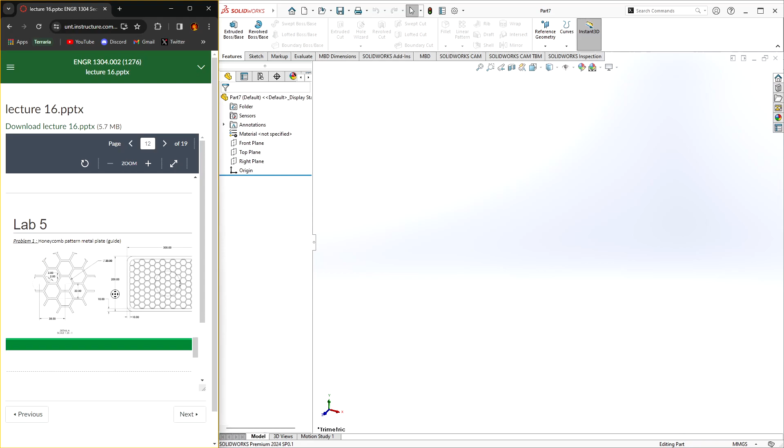Alright guys, so lab 5. We have to make this honeycomb pattern. So what we're going to do is just make the honeycomb pattern first and then make the frame around it second.

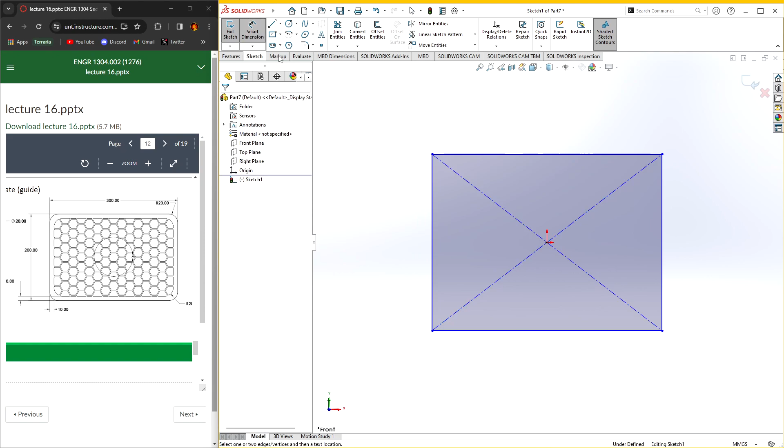On my front plane I'm going to do a sketch. I'm going to make a base plate, not with the corner of the rectangle, but with the center rectangle. So I'm just going to do this, set the length equal to 300, set the height equal to 200.

I want to fillet the corners to be 20 millimeters. Bang, bang, and this one too. Okay, so with that done, I'm going to make a polygon.

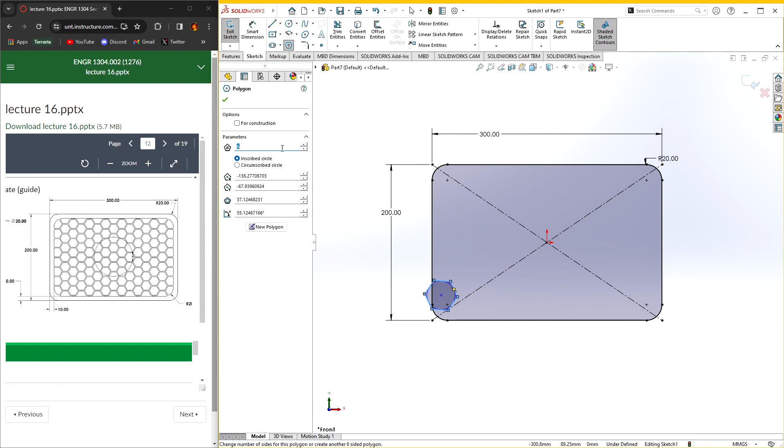I'm going to just make it out here. I don't want it to be correlated to any of this, I just want it to exist. So I'm just going to make it right here. This one is going to be our parent polygon. I'm going to make it have a diameter of 20 millimeters, and set the top part to be horizontal.

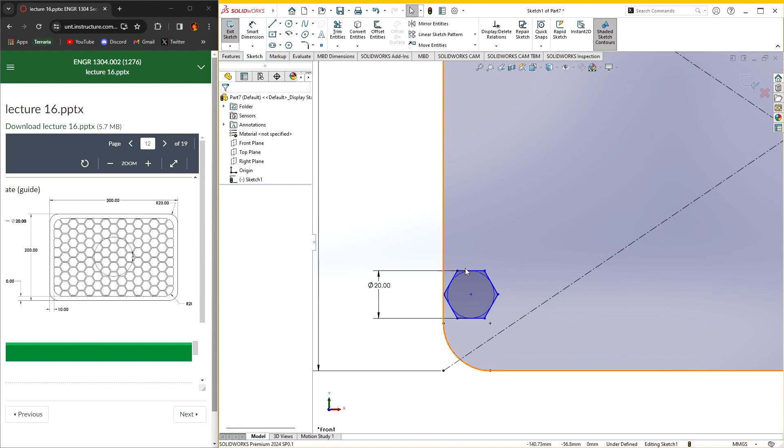From here we're going to do a linear sketch pattern. I'm going to highlight all the edges as well as the arc in the center. There we go, linear sketch pattern.

So what I wanted to be able to do is go all the way to the opposite side and also all the way up. If I count from the drawing that he gave us, I want one to end up right here in the center. So from here there are 1, 2, 3, 4, 5, 6, 7. So from here I need 7, spaced apart.

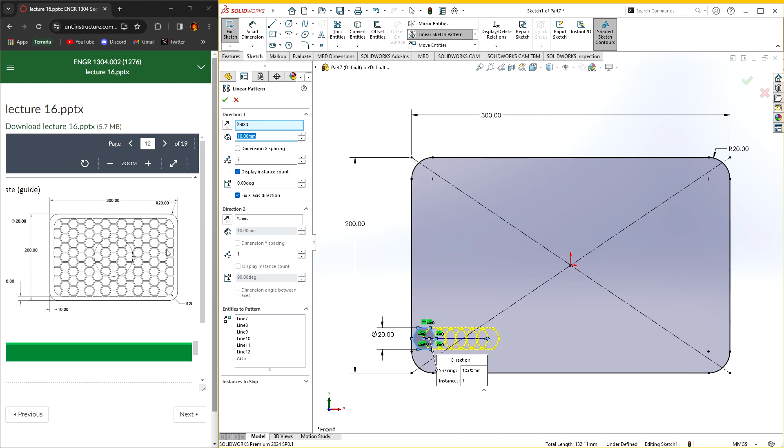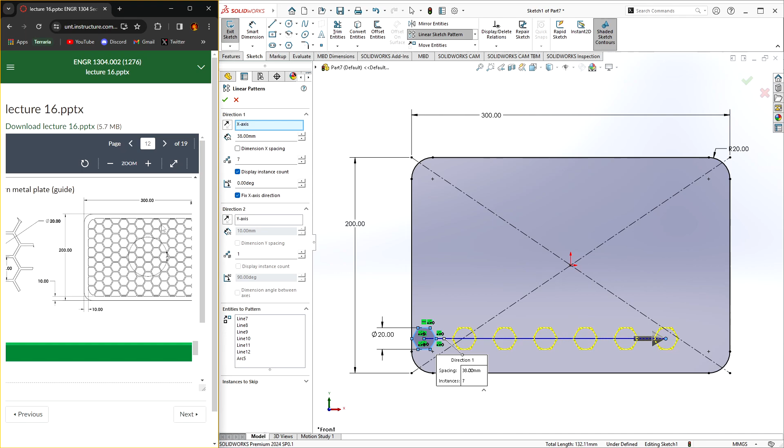38 millimeters apart. And then I want them to be 22 millimeters high on our y-axis. Well first let's see how many I need in my y-axis. So I need 1, 2, 3, 4, 5, 6, 7, 8, 9. So I need 9, spaced apart 22 millimeters. There we go.

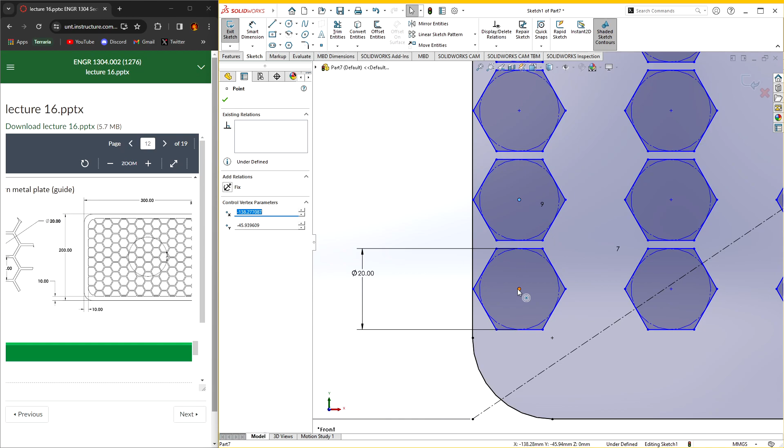And we're gonna click OK. So with this I'm gonna put one in the center in a minute, but first I need to organize these because these are all just free floating. So what I'm gonna do is click that midpoint, make those vertical to each other.

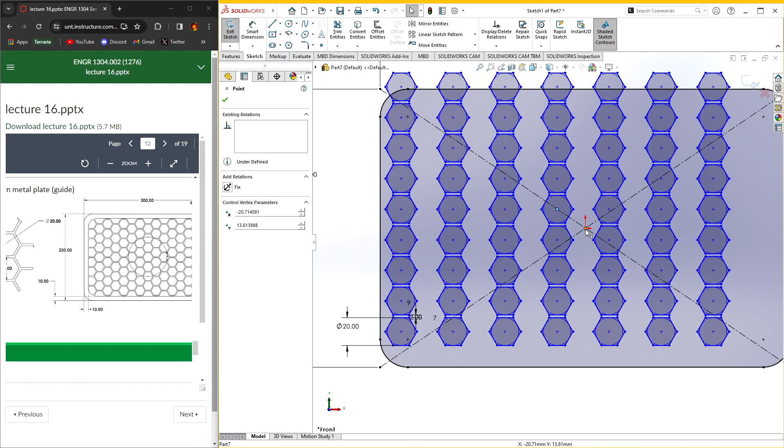I'm gonna set the distance between them to 2. Let's see, where else do I need to move this? Okay, I think I just need to move this to be in the center point. So I'm going to click the center point of this and the origin, make it coincident. So now the middle row is fully defined.

Oh, I forgot to set the distance between you and you, you need to be 38. Yes, okay, so there we go. That's the first part of the honeycomb pattern.

Now I need to make the outer, in-between rows. So same thing basically, just go over here, make a polygon, make sure it's not connected to anything, I just want it to exist. And I'm going to set this to be horizontal, and set the dimensions of this to be 20 millimeters.

I'm going to set the distance between you and you to be 2, and the distance between you and you to be 2 as well. Okay, there we go. Then sketch pattern, entities to pattern: all the edges plus the arc.

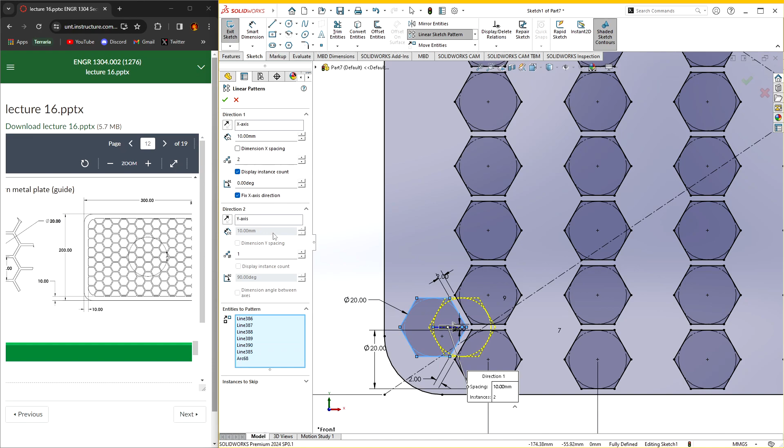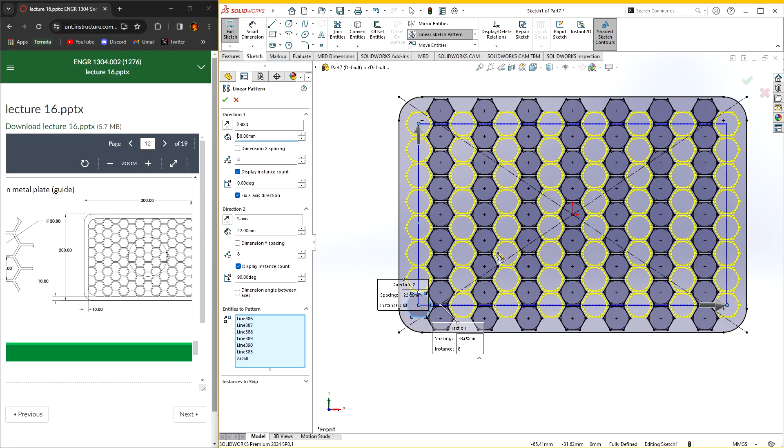And it should be 1 more than we did last time. So this one was 7, so now it's 8. And this one was 9, so this one should be 8 as well. So this needs to be 22 millimeters spaced apart, and this should be 38 millimeters spaced apart. So now it fills up the rest of the board.

Okay, and same drill, just set the center points vertical to each other, and set the dimensions between them to be 2.

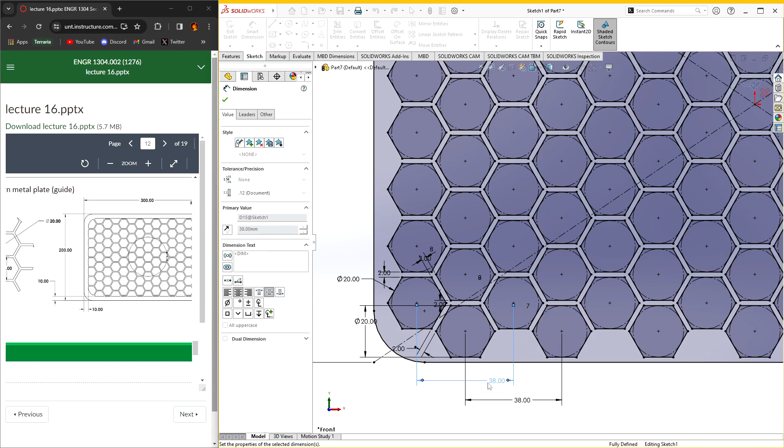And then set the midpoints between you and you to be 38. Yep, okay, so that's it.

Okay, so now that we did our honeycomb pattern, what I'm going to do now is make the base frame of it. So I'm going to exit the sketch and hide this. I'm going to go back into my front plane, make another sketch, and do a center rectangle from right here. Make this 300 by 200.

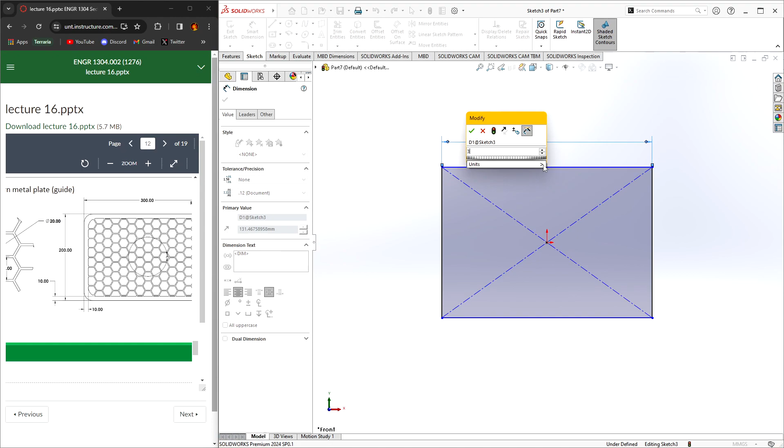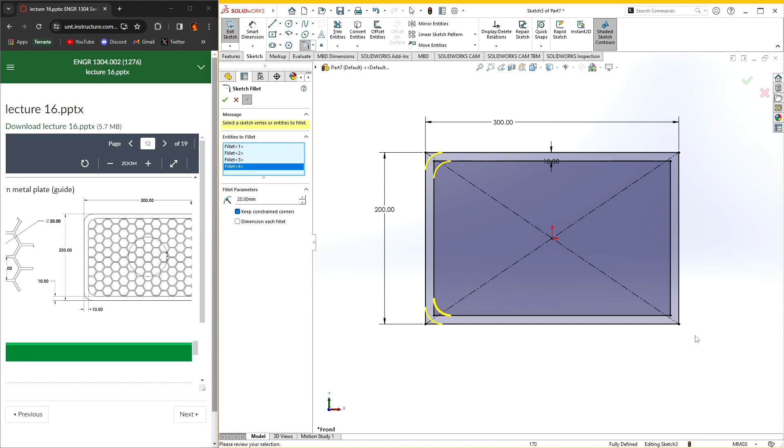And I'm going to offset this to 10 millimeters, because it says so right here, 10 millimeters. So with that, I'm going to get the fillet. I'm going to set that to 20, and click both corners. That one, this one, that one, this one, that one, and this one, and that one.

Okay, so that's our base plate. So I'm going to extrude the sketch one first. I'm going to go over here, extrude, and set this to 5 millimeters. I'm pretty sure that's what the thickness said it was. If I go back up, yeah, thickness is 5 millimeters.

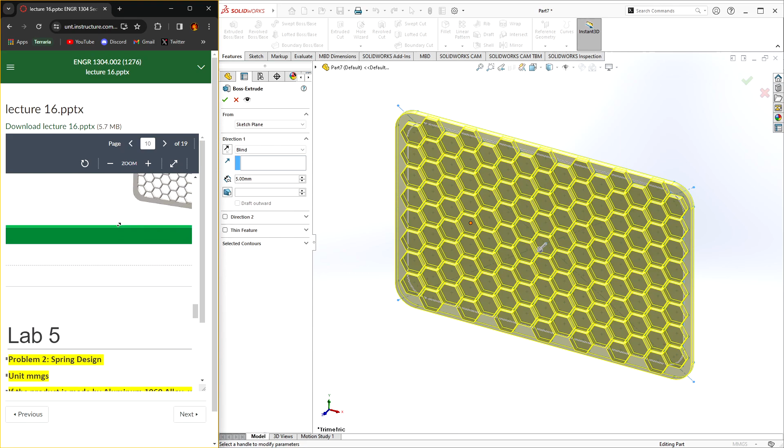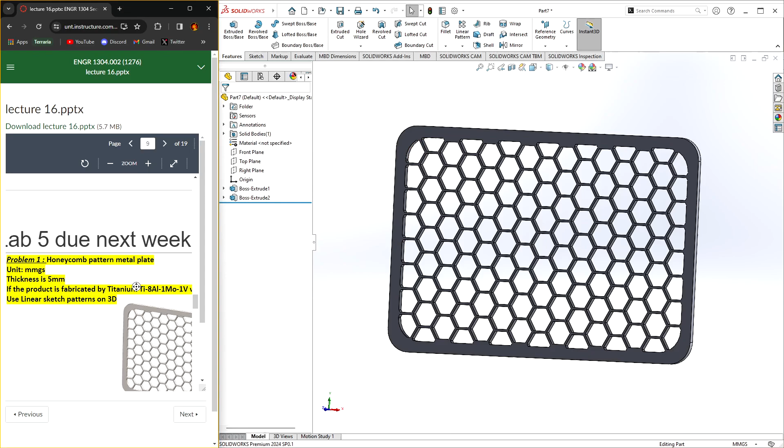If the product is fabricated by titanium, whatever that is, so I'm going to set that to 5, okay? And then I'm going to set the sketch of the base plate, I'm going to extrude this one to also be 5. There we go. So now the corners are rounded, just like it is in here, and all of the hexagons are apart from each other.

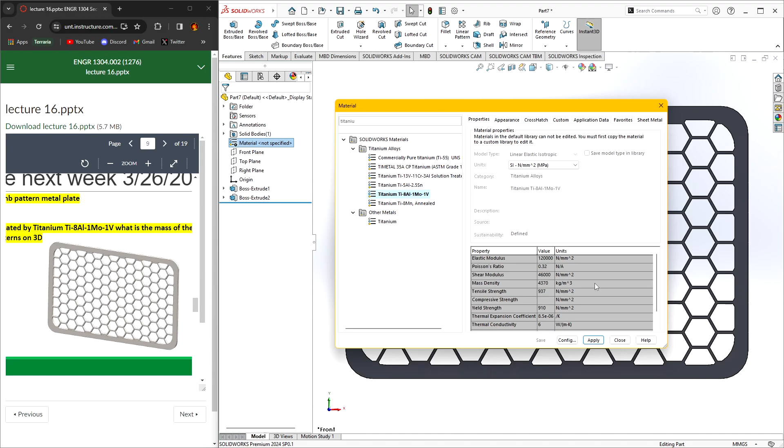Yeah, okay, and then all we have to do now is just set the material. So the material is titanium. Titanium Ti-8Al-1Mo-1V. Yeah, that's this one, and that's what this is.

So I have a mass properties of 398.39 grams for the mass. Volume is 91165.53 cubic millimeters, and the surface area is 84336.49 square millimeters. Alright, so now time for the spring.

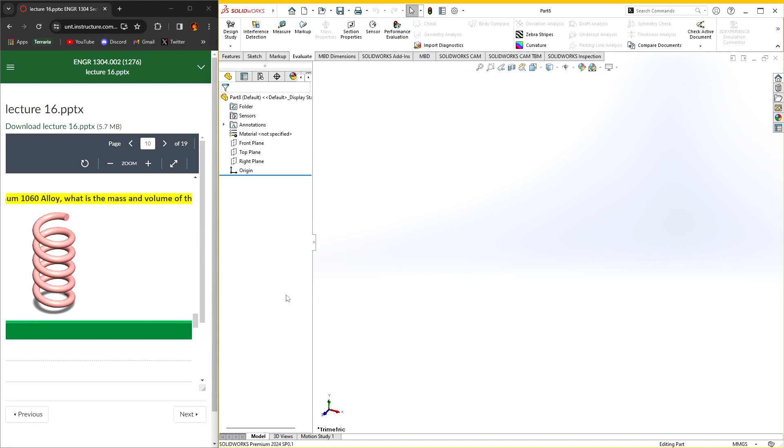So the spring is pretty easy. He even makes a guide on how to make it. So to go over it, basically we just go to our top plane, we make a circle from right there, make the diameter 200. There we go. Exit the sketch. We're going to go back to our sketch tab, or I mean my features tab.

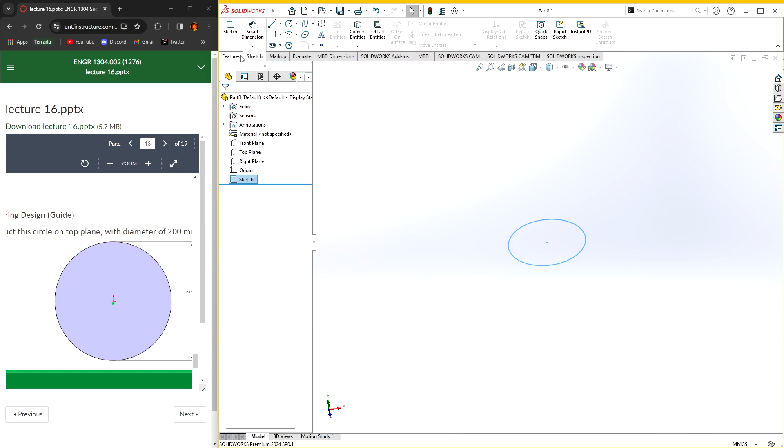Go over here to curves, helix and spiral. Select the circle, and then let's see here, let me see the settings. Pitch and revolution, constant pitch, 100 millimeter pitch, 5 revolutions, and a start angle of 180 degrees clockwise. So just have all of those set.

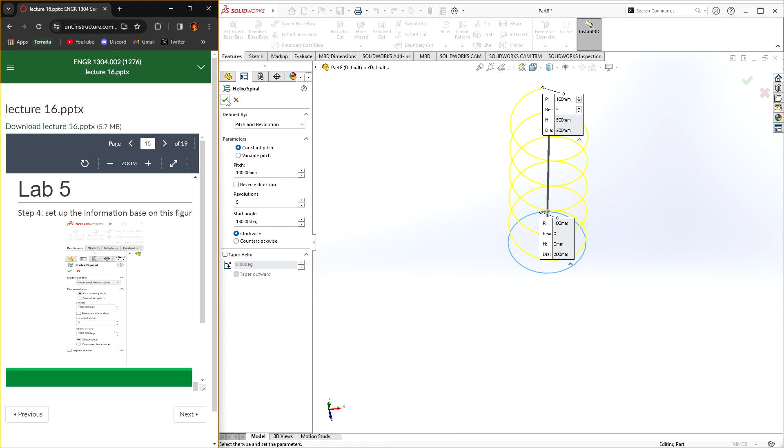So now we have our spiral, and he wants us to set a plane. So select your reference geometry and select plane, and then over here select the very end point, the tip of the spiral, right? And then just make the plane. Right click it, sketch.

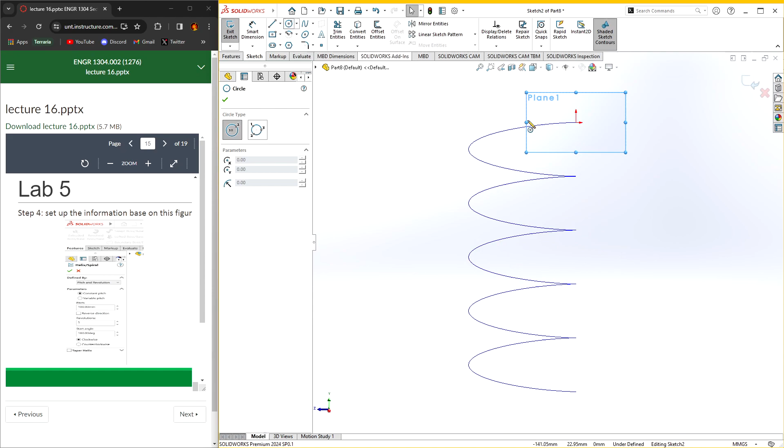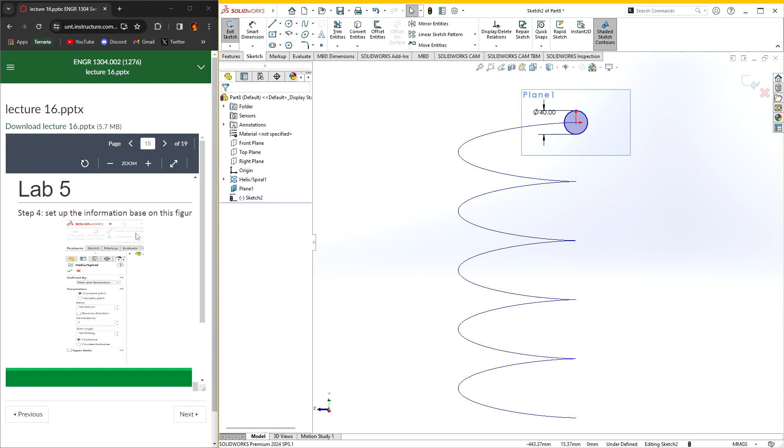And we're going to make a circle, right? Try to get it to where the origin is, but to make sure, over here in parameters, just set the x and the y to 0. So there we go. And I'm going to set the dimensions of this to be 40. Pretty sure it was 40, with diameter 40 millimeters, yeah. So center at x0 and y0, 40 millimeters of diameter.

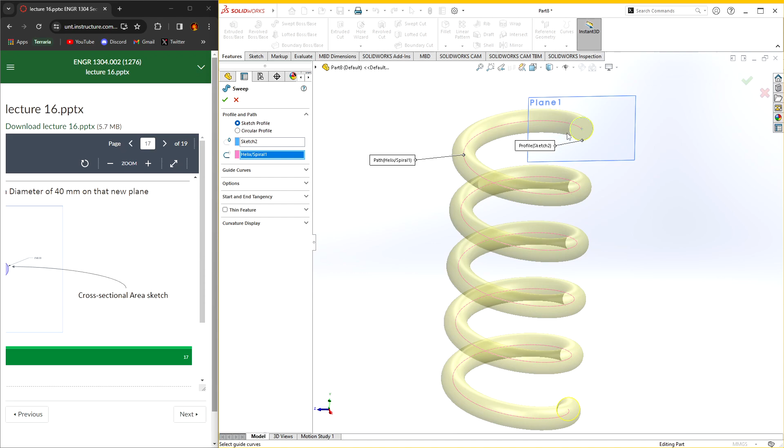Yep, so now with that, exit the sketch again. Do a swept boss and base. So we have our sketch 2 selected, and then we're going to select the spiral. So select both of those, and we made our spring.

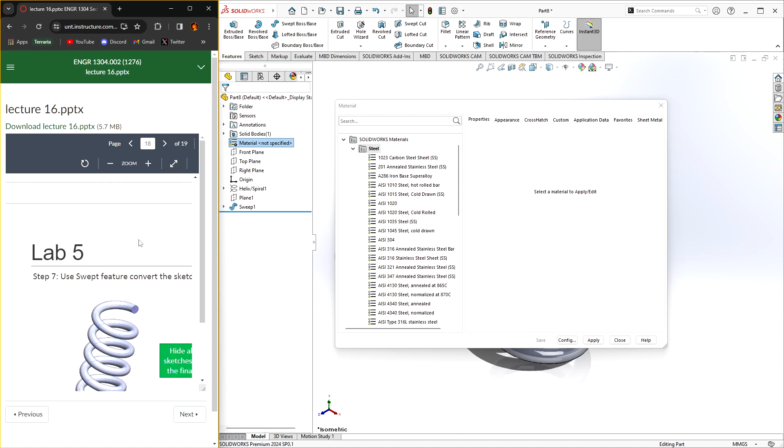I'm going to hide the plane and also our drawing for the spiral. And I'm going to make the material, I believe it was copper. Was it copper? I think it was. Let me see, up here at the top. If the aluminum 1060 alloy, so I can just put 1060 and I'll get aluminum alloys. There we go.

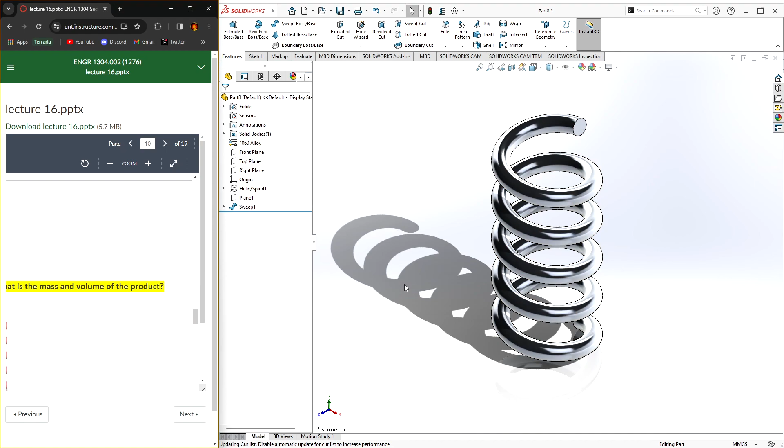So that is it for lab 5. Yeah, okay, let's see, what mass properties did I get? Mass is 10792.55 grams. Volume is 3997241.08. Surface area is 402253.76. And that is it.